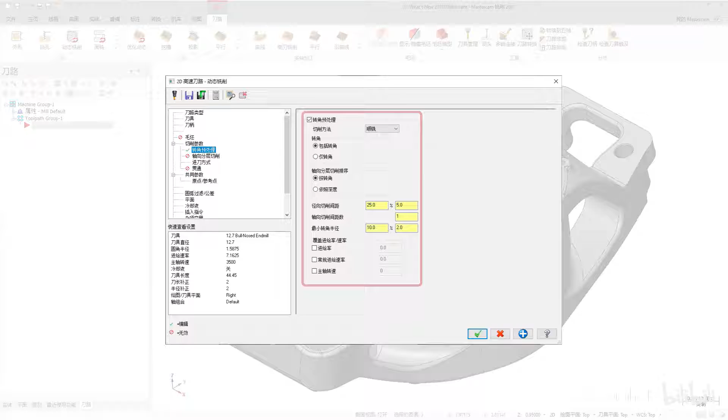A new page, Corner Pretreatment, has been added to the Dynamic Mill toolpath. Use the options on this page to set machining parameters on any corners in the selected machining regions before machining the rest of the part. These new options are particularly helpful if you have sharp corners in your part. Additionally, this can reduce the amount of thin wall islands that are created when machining.

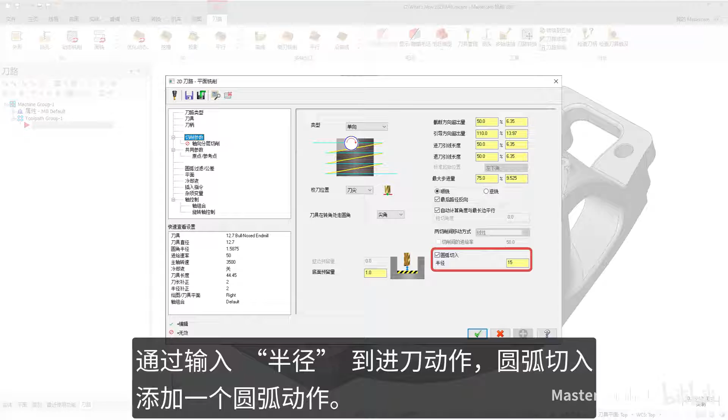A new option, Roll In, has been added to the Cut Parameters page for face toolpaths. Roll In adds an arc move with the entered radius to the lead move-in. This move is always opposite the step-over direction. This option is particularly helpful with tool engagement, resulting in less tool stress.

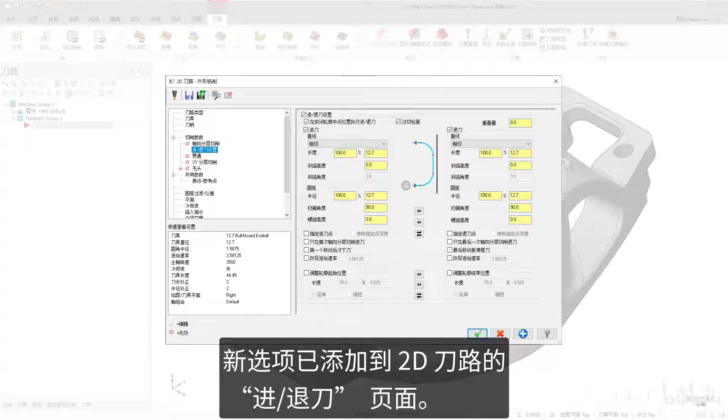A new option has been added to the Lead In Out page for 2D toolpaths. This new button lets you swap the parameter values for the entry or exit sections without losing information.

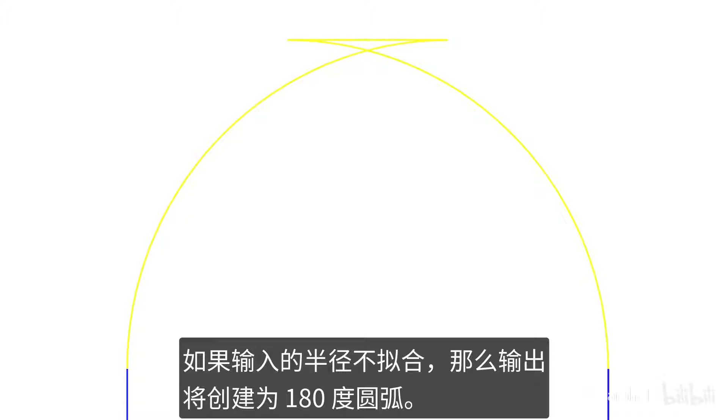Two new options are available on the Linking Parameters page for all 2D toolpaths. The Arc Fit Maximum Radius option attempts to fit 90-degree arc moves into rapid and clearance moves. If the entered radius does not fit, then the output is created as a 180-degree arc.

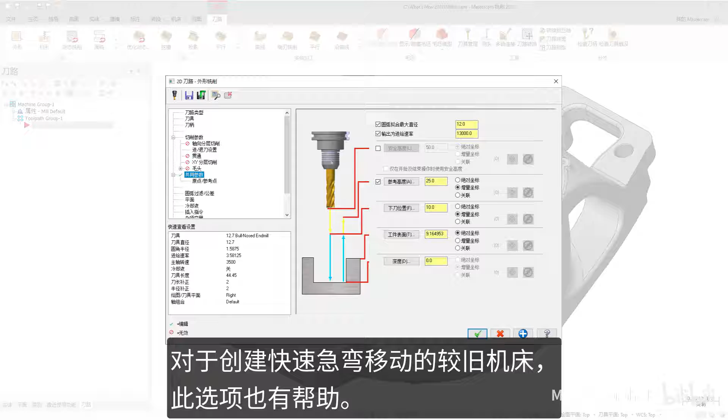Use the Output Feed Move option to output the rapid move between passes as a feed rate move instead of a rapid move. This may be helpful when the tool needs to make many irregular moves per pass to jump between different areas of the part. This option is also useful for older machines which create dogleg moves for rapids.

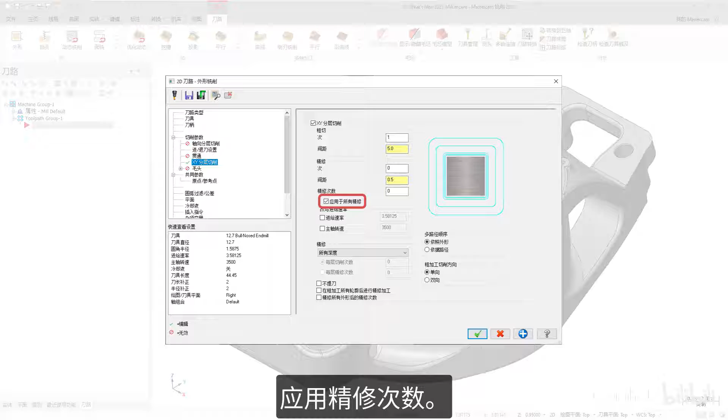The 2D Contour toolpath now includes the following enhancements. A new option, Apply to All Finish Passes on the Multi-Passes page, applies spring passes after the last finish pass for each defined depth set by the finish passes parameter. When deselected, spring passes are only applied after the last finish pass at the final depth.

Another new option on the Multi-Passes page, Machine Spring Passes after finishing all contours, allows you to perform spring passes after all finishing cuts and depth cuts have been completed.

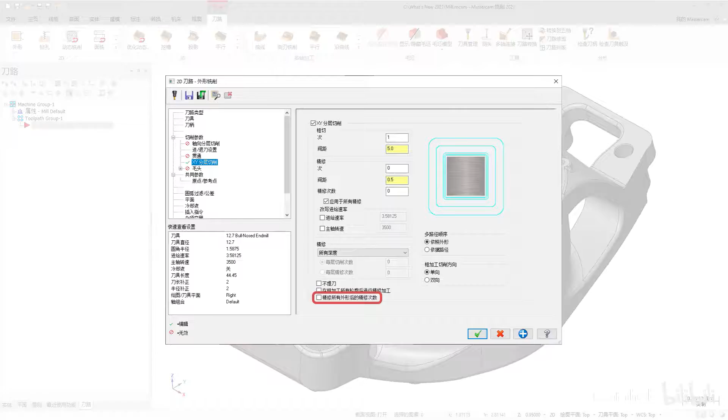Profile Ramp is a new option in the line drop-down on the Lead In Out page for 2D contour toolpaths. When you select this option, you can only modify the ramp angle value. Profile Ramp uses a continuous ramp to transition smoothly between Lead In and Lead Out moves.

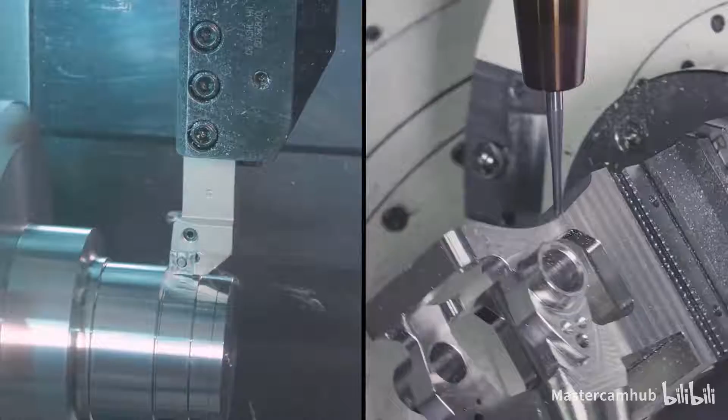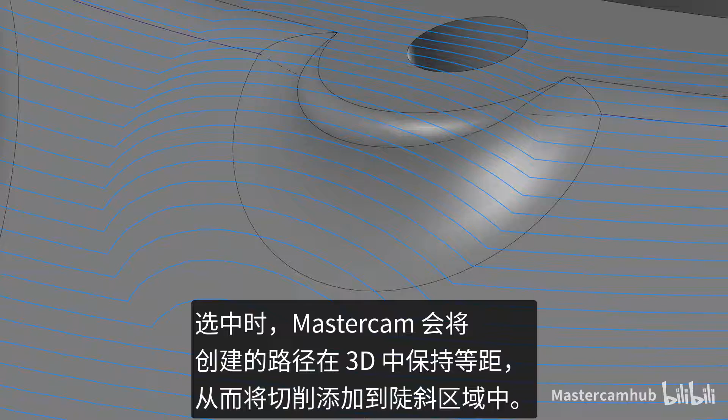The 3D High-Speed Blend toolpath now includes the following enhancements. The 3D option in the Project drop-down on the Cut Parameters page is now available. When selected, Mastercam keeps the created passes equidistant in 3D, adding cuts to steep areas.

The new Number of Passes checkbox located on the Cut Parameters page lets you set the exact number of cutting passes. The new Flip Step Over checkbox located on the Cut Parameters page reverses the cutting direction of the Blend toolpath.

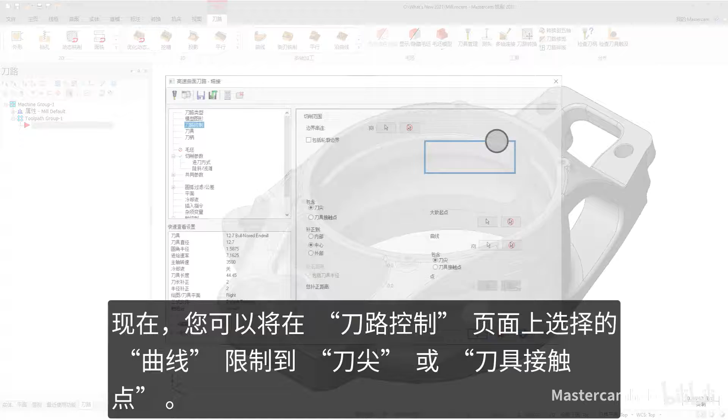You can now confine selected curves on the toolpath control page to either the tool tip or tool contact point. Tool tip confines the tool center inside the selected curves. Tool contact point confines the tool contact points inside the selected curves. The tool center may run outside the selected curves, but the contact point of the tool will not.

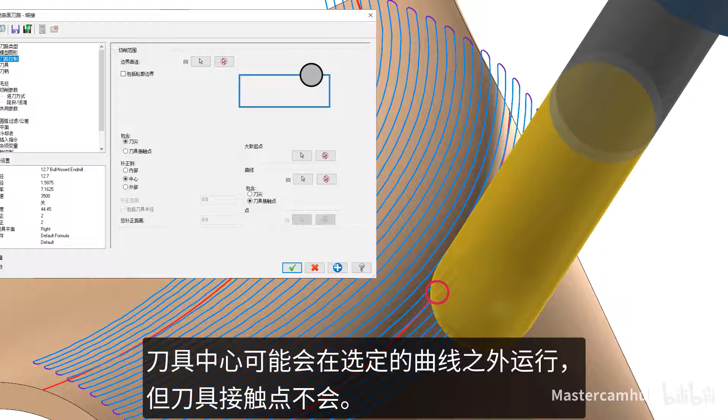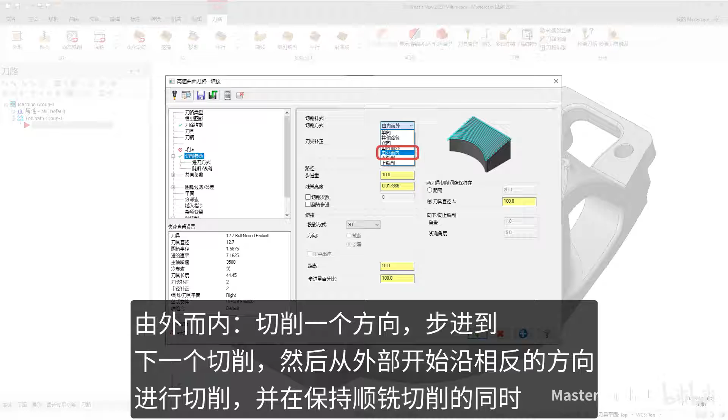Two new methods are now available in the Cut Method drop-down on the Cut Parameters page. From Center cuts one direction, steps over to the next cut, and cuts in the opposite direction, starting from the center and working its way outside while maintaining a climb cut. To Center cuts one direction, steps over to the next cut, and cuts in the opposite direction, starting from the outside and working its way to the center while maintaining a climb cut.

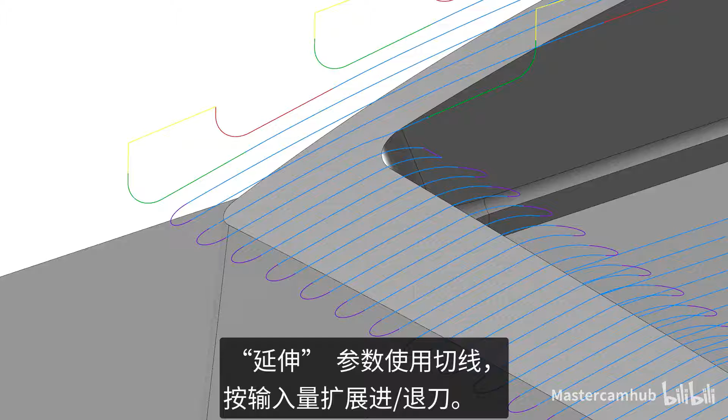The Linking Parameters page for 3D toolpaths now includes two new options: Apply Transitions and Extension. Apply Transitions, when selected, sets retract motions to be transition motions. The new transition motion uses the values set on the Transitions page. Apply Transitions is not available for horizontal area, area roughing, and Dynamic OptiRough toolpaths. The Extension parameter extends the lead motion by the entered amount using a tangential line.

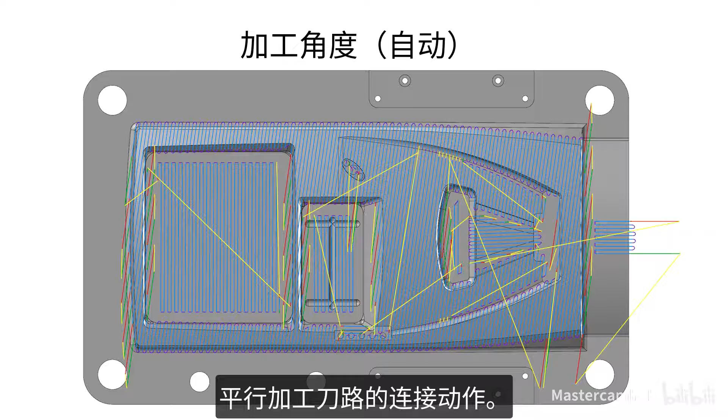You now have an option to have Mastercam automatically set different angles to maximize the length of the cut pattern and/or minimize the connecting moves of a raster toolpath. This option is on the Cut Parameters page.

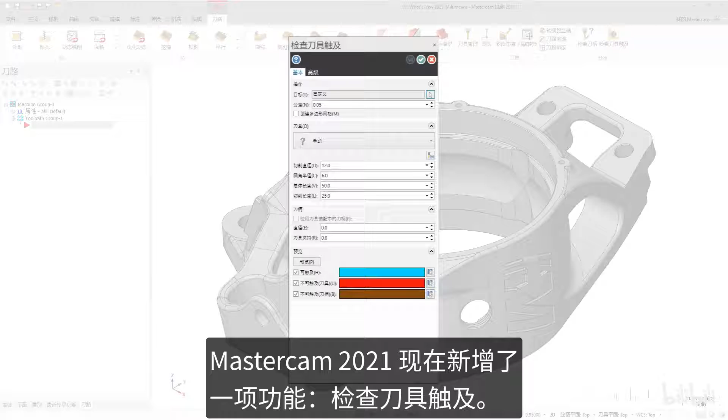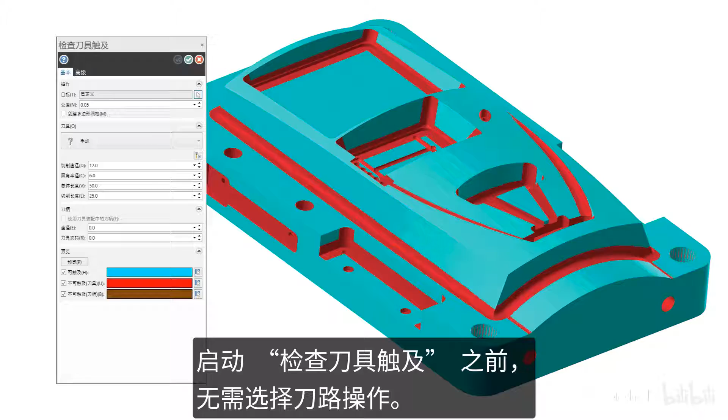A new function, Check Tool Reach, is now available for Mastercam 2021. Use Check Tool Reach to check your tool and holder against the selected model geometry to view where the tool can and cannot reach. The selected model geometry is then colored based on the selected preview options: Reachable, Unreachable Tool, and Unreachable Holder. You do not need to select a toolpath operation before launching Check Tool Reach. Check Tool Reach is available on the Mill Toolpaths contextual tab.

The Skip Pockets Smaller Than option is now available for 2D Dynamic Mill. Additionally, for Dynamic Mill and Dynamic OptiRough, there is a new option to skip all pockets. These options are located on the Toolpath Control page for Dynamic OptiRough and the Entry Motion page for Dynamic Mill.

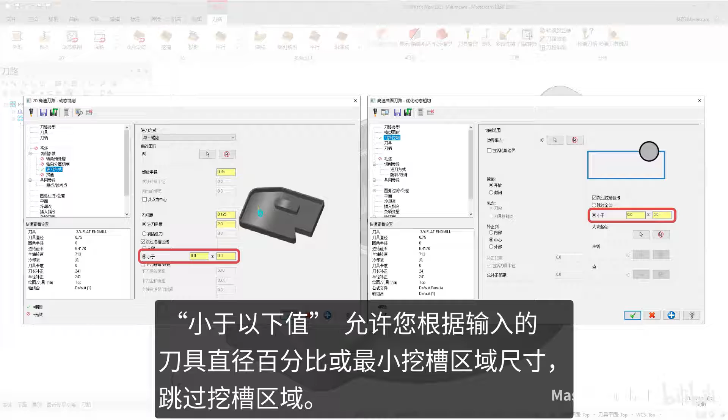Smaller Than allows you to skip pockets based on the entered tool diameter percentage or a minimum pocket size. When you enter a value for either the tool diameter percentage on the left or for the minimum pocket size on the right, the other parameter updates. Skip All skips all pockets.

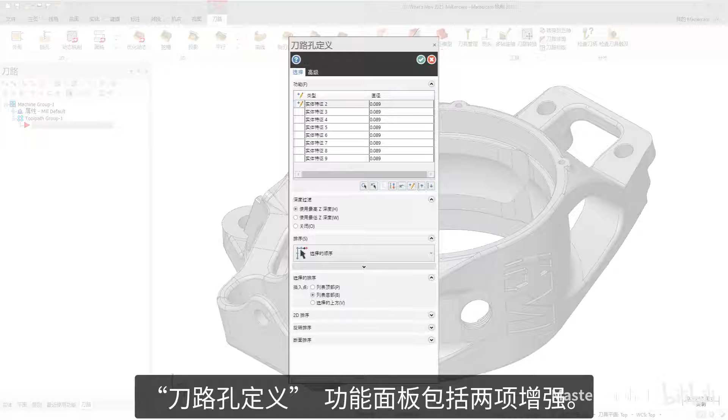The Toolpath Hole Definition function panel includes two enhancements. On the Selection tab, a summary of all edited change at point parameters is now conveniently displayed on a tooltip in the features list. The Advanced tab now features the Allow Multiple Solid Bodies option. This option recognizes same-sized holes across multiple bodies when selecting with Control-click.

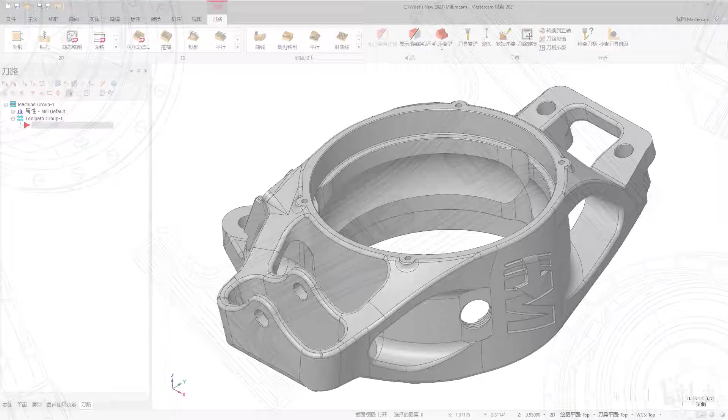Mastercam 2021 features a new toolpath, Advanced Drill. Advanced Drill is a customizable multi-segment drill cycle that is useful for spot drilling, deep hole drilling, and back spot facing. Each segment of the drill cycle can be defined in a table on the Toolpath's Cut Parameters page.

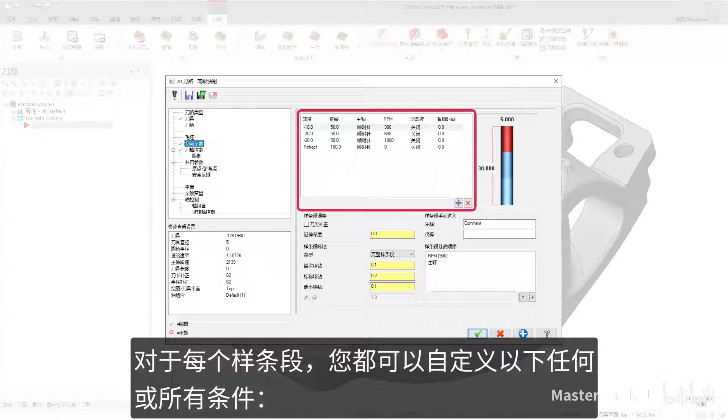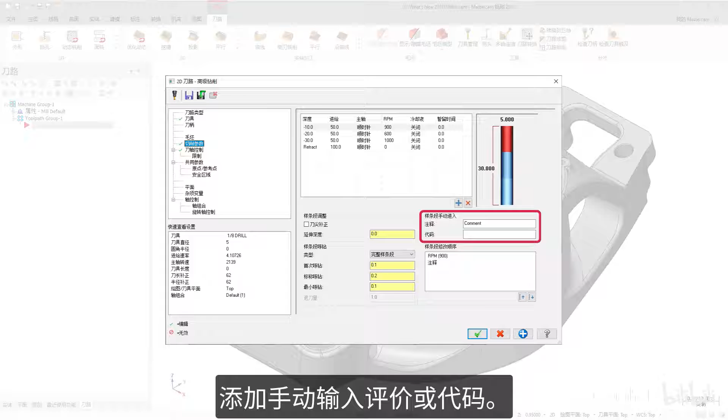For each segment, you can customize any or all of the following conditions. Define individual pecks within the segment, including retracts to simulate a chip break cycle. Set the feed rate or choose rapid motion. Change the spindle speed and direction. Turn coolant options on or off. Add manual entry comments or code. Fine-tune the order in which the commands are output.

Like other drill operations, you can use the Tool Axis Control page to choose 3, 4, or 5-axis output. Choosing 4-axis or 5-axis output gives you access to additional multi-axis features like Safety Zone. Advanced Drill is located in the 2D gallery on the Mill Toolpaths contextual tab.

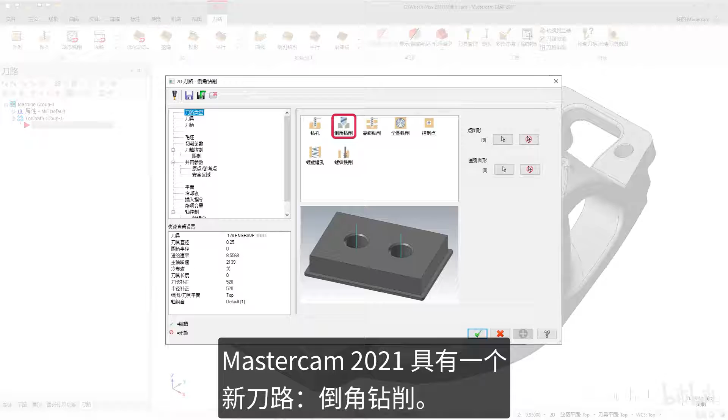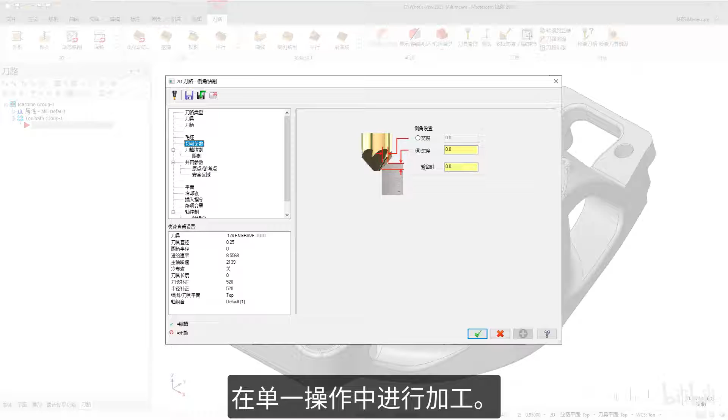Mastercam 2021 features a new toolpath, Chamfer Drill. Using tools with a tip angle, the Chamfer Drill toolpath chamfers holes after calculating the correct depth based on the desired width or depth. The Chamfer Drill toolpath also lets you select holes of different diameters or sizes, or that lie in different planes, and machine them in a single operation with a single tool. You can use any tool with a tapered tip, not just a drill.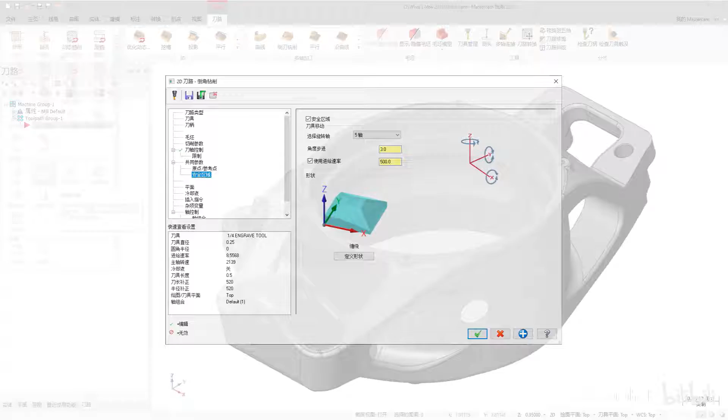Like other drill operations, you can use the Tool Axis Control page to choose 3, 4, or 5-axis output. Choosing 4-axis or 5-axis output gives you access to additional multi-axis features like Safety Zone. To create the toolpath, select Chamfer Drill in the hole-making section of the 2D Mill Toolpaths. Then in the Graphics window, select the entities you want to add to the features list.

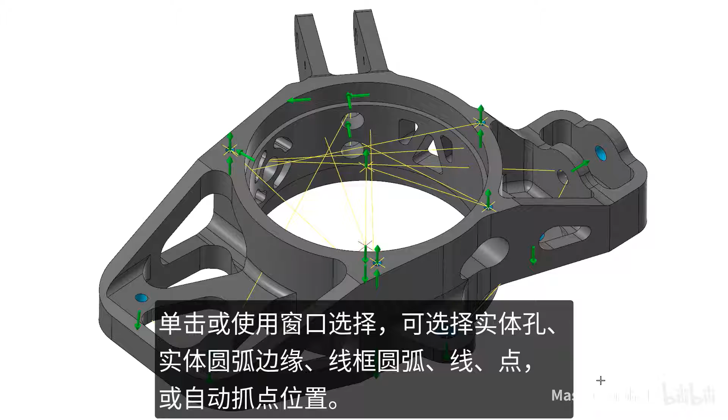Use the following methods to make and manipulate your selections. Click or use Window Selection to choose solid holes, solid arc edges, wireframe arcs, lines, points, or AutoCursor positions. Control and click to select all matching radius solid features. Control, Shift, and click to select all matching radius solid features on the same vector as the initial selection. Click a selected solid feature's arrow to change direction.

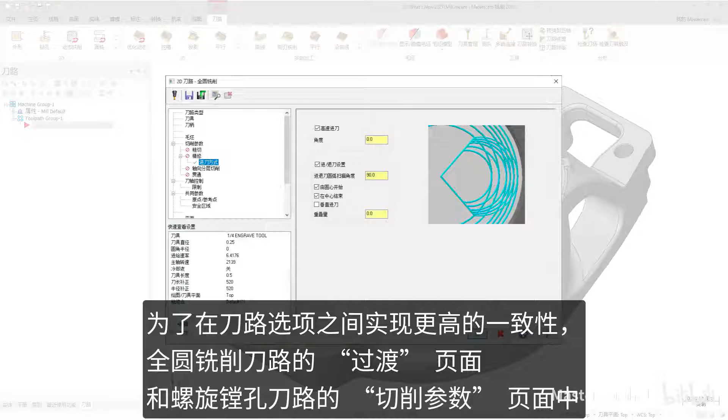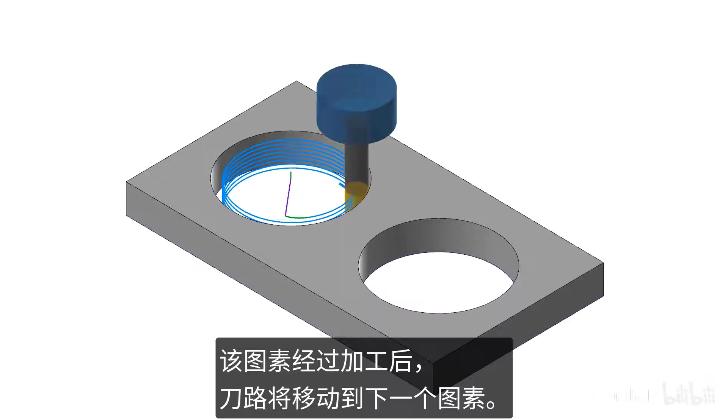For more consistency between toolpath options, an End at Center option has been added to the Transitions page of the Circle Mill toolpath and the Cut Parameters page of the Helix Bore toolpath. You can now choose both Start at Center and End at Center in these toolpaths. Start at Center begins the toolpath at the center of each selected entity. Once that entity has been machined, the toolpath moves to the next entity. End at Center ends the toolpath at the center of each selected entity. Once that entity has been machined, the toolpath moves to the next entity.

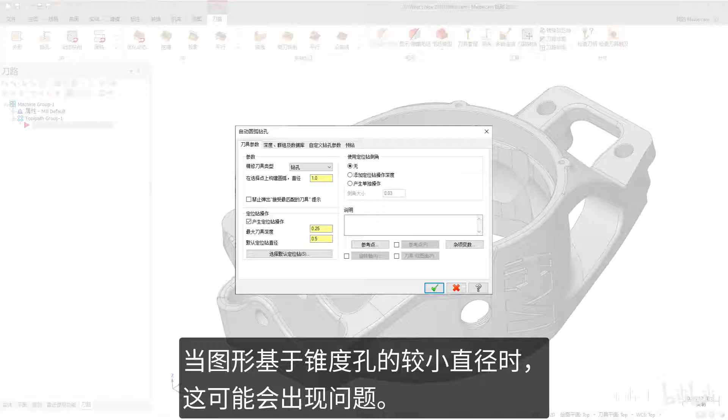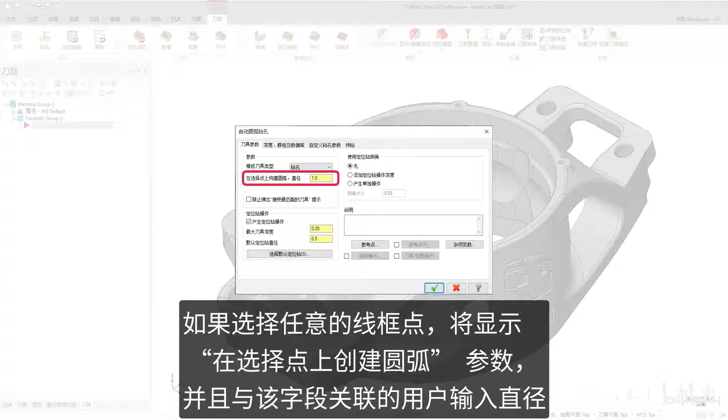When using the Auto Drill toolpath to create operations for tapped holes, Mastercam chooses the tap size based on the diameter of the selected arcs. This can be a problem when the geometry is based on the minor diameter of a tapped hole. Now when you select only arcs, Mastercam displays the Override Geometry Diameter parameter in place of the Create Arcs on Selected Points on the Tool Parameters tab. Mastercam uses the existing hole diameter and lets you select the Override option. If any wireframe points are selected, the Create Arcs on Selected Points parameter displays, and the user-entered diameter associated with that field defines the hole diameter.

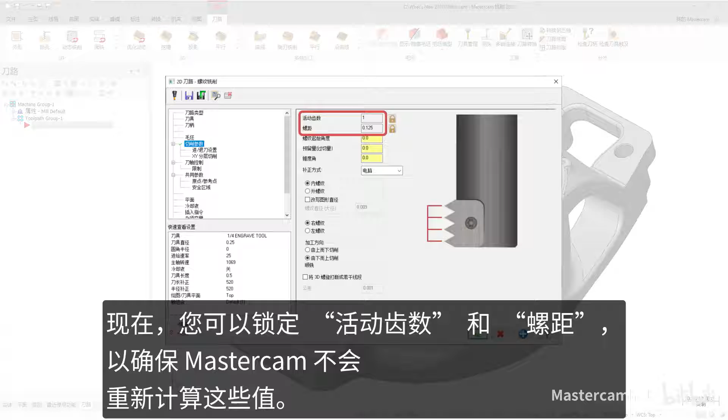Because Mastercam automatically calculates fields like thread pitch, manual changes to such fields can be overwritten whenever Mastercam is called to recalculate these values. You can now lock number of active teeth and thread pitch to ensure that Mastercam does not recalculate these values. Click the lock icons to toggle their status. Locked fields cannot be edited.

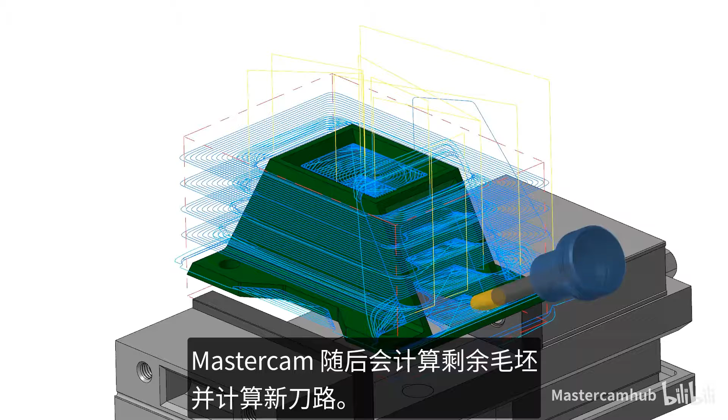The new 3+2 automatic roughing toolpath automatically makes multi-plane 3-axis toolpaths for roughing. Mastercam analyzes the stock model and then creates a roughing toolpath. Then Mastercam calculates the remaining stock and computes a new toolpath. This continues until only a defined amount of stock remains. The results are all contained within the one toolpath. 3+2 automatic roughing is located in the multi-axis gallery on the Mill Toolpaths contextual tab.

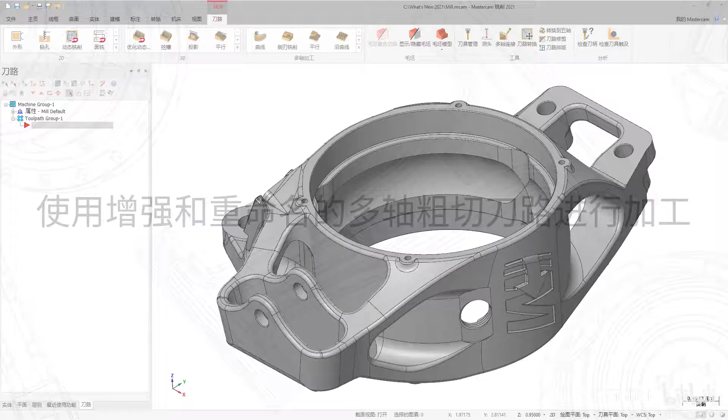The multi-axis roughing toolpath has been enhanced and renamed to multi-axis pocketing. This revised toolpath includes new options such as undercut roughing, wall finishing, and floor finishing. Multi-axis pocketing provides greater control of the tool contact point and machining angle when using accelerated finishing tools. These options ensure that you get the best possible motion from these tools.

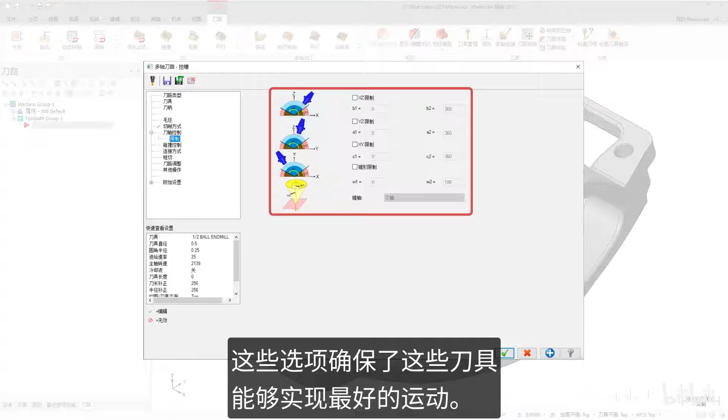The Curve, Flow, Multi-Surface, Swarf, and Port toolpaths now have separate feed rate control options for entry and exit linking moves. These controls are on the Entry/Exit page under the Linking page.

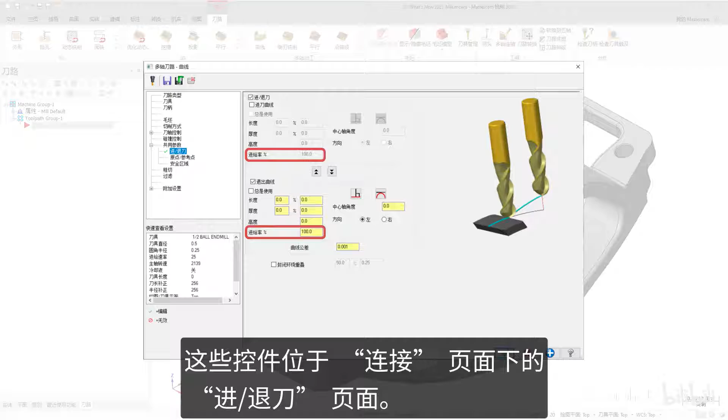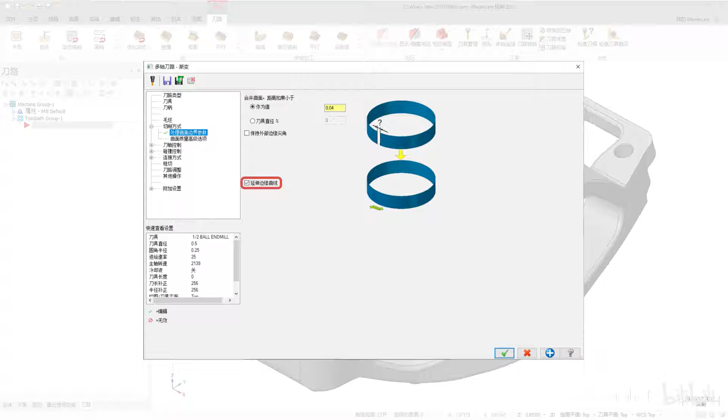We have added the Extend Edge Curve option to the Morph toolpath to give you better control over your toolpath results. By using this option, you can get a different toolpath without drawing additional geometry. The Extend Edge Curve option is on the Parameters for Surface Edge Handling page. In previous versions of Mastercam, you needed to add wireframe and use it to generate the Morph toolpath. In Mastercam 2021, you no longer have to add wireframe. Selecting Extend Edge Curves creates the following toolpath.

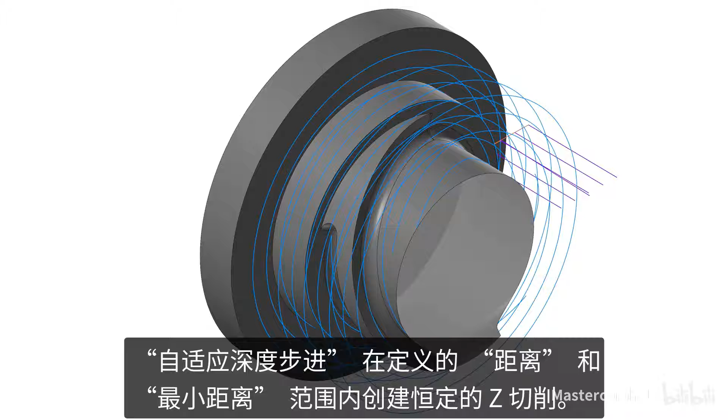A new option, Adaptive Depth Step, has been added to the Cut Pattern page for the Rotary Advanced toolpath. Adaptive Depth Step creates constant Z-cuts within the defined distance and minimum distance. Constant Depth Step creates constant Z-cuts.

The Cut Pattern page now includes smoothing options. Use the Corners percentage option to fillet the sharp corners of inner contours, specifying the radius of the fillet as a percentage of the step-over distance. The Final Contour percentage option does the same for sharper corners of the outer contours.